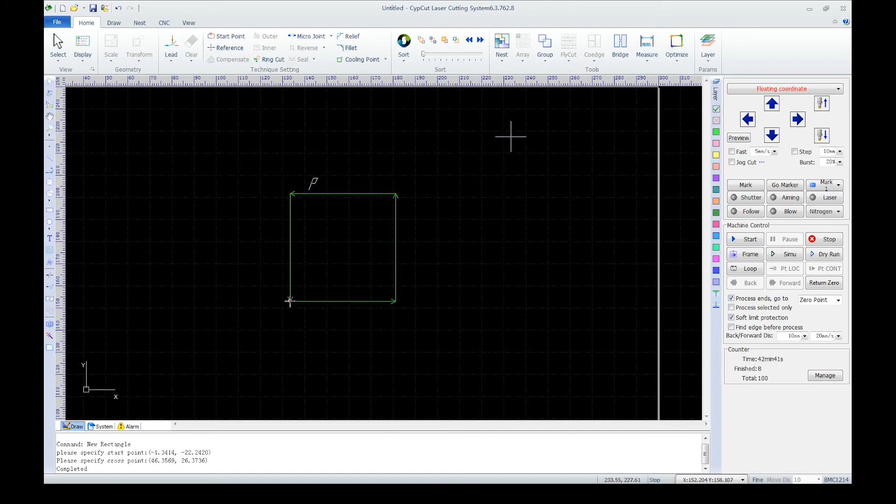So far we've learned about features in view, geometry, technique setting, which enable us to quickly draw graphics and set basic techniques. Sort, group, fly cut, and co-edge help us to simplify cutting paths to be efficient. Today we're gonna learn a few more features of layers, task, and find edge, as well as how to use the machine control panel.

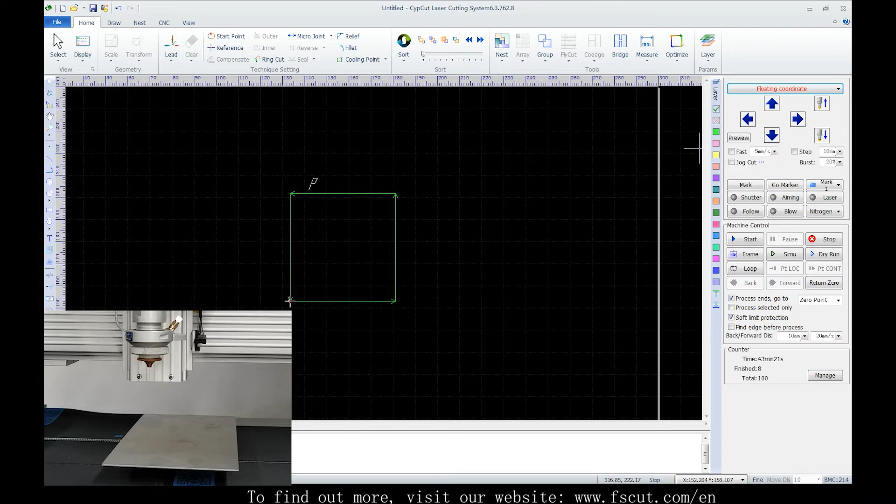Let's start with the machine control panel. First of all, we need to figure out the difference between floating coordinate and workpiece coordinate. Machine coordinate is a fixed system. To facilitate flexible cutting tasks, CypCut applies floating coordinate and workpiece coordinate. Direction definition in different coordinate systems is the same. The only difference is 0-point position. The white box is the machine bed, and the red cross is the laser head.

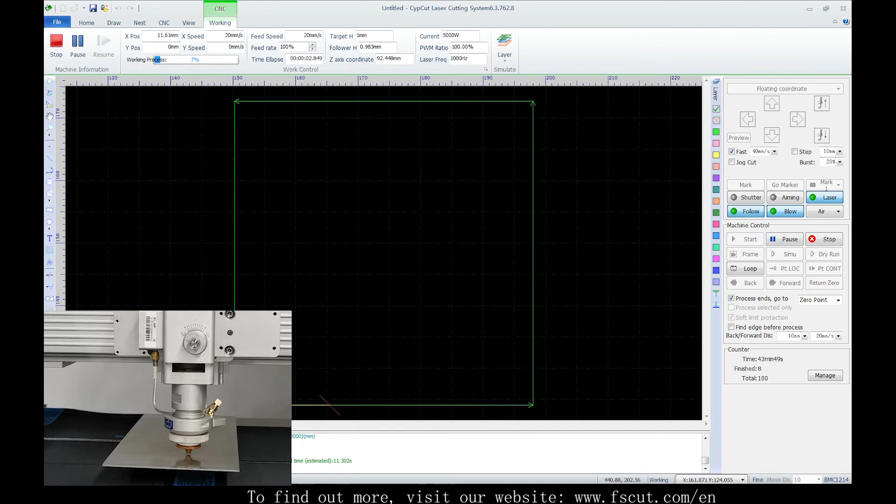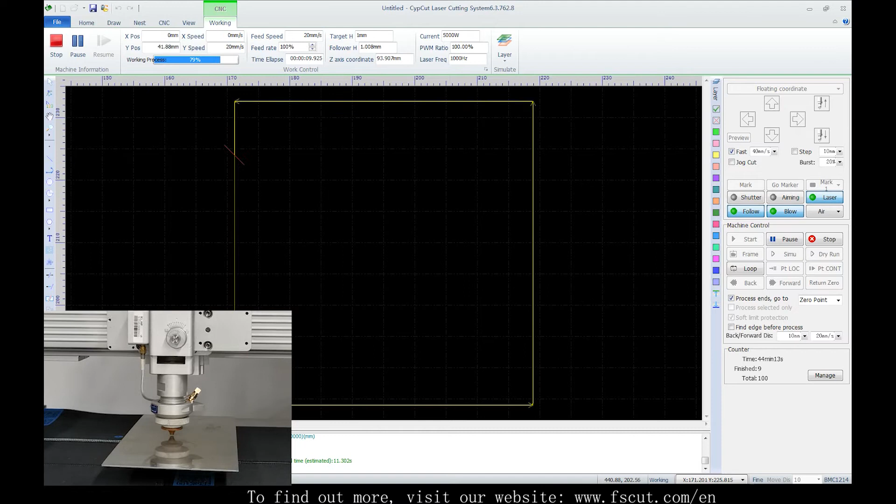On the floating coordinate, laser starts cutting from where it stands. 0-point is the current position of the laser head. Take this position. We can start right from the point. And if we move to another position, it will start right from it. Floating coordinate is usually used in small batch cutting tasks.

Under workpiece coordinate, we've got a default 0-point with its position 0, 0. But 0-point is a user-defined position under workpiece coordinate. CypCut allows users to set 9 workpiece coordinates of different 0-points. During the process, if the cutting head was moved to another position, so long as it gets an instruction to start, it will return to the graphic next to the defined 0-point, and then start cutting.

This coordinate is used in mass production scenarios where large quantities of plates of the same size are placed in the same position on the machine bed, which also requires a 0-point of fixed position.

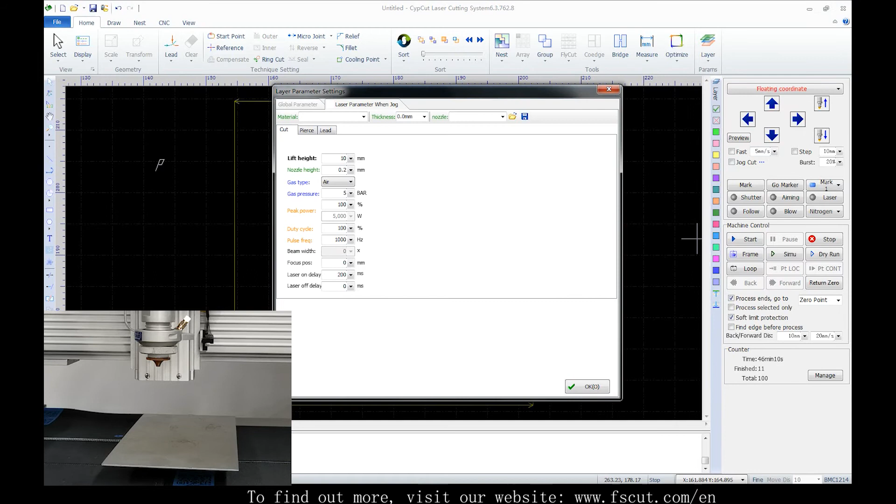Down below, with these buttons, we can jog along the X, Y, Z axis. We can change jog speed, and set a fixed jog distance. Jog cut is used to cut off plates. When selected, the cutting head will start to follow. Blow while jogging. And here, we can set the jogging parameter. Beside, this is burst power.

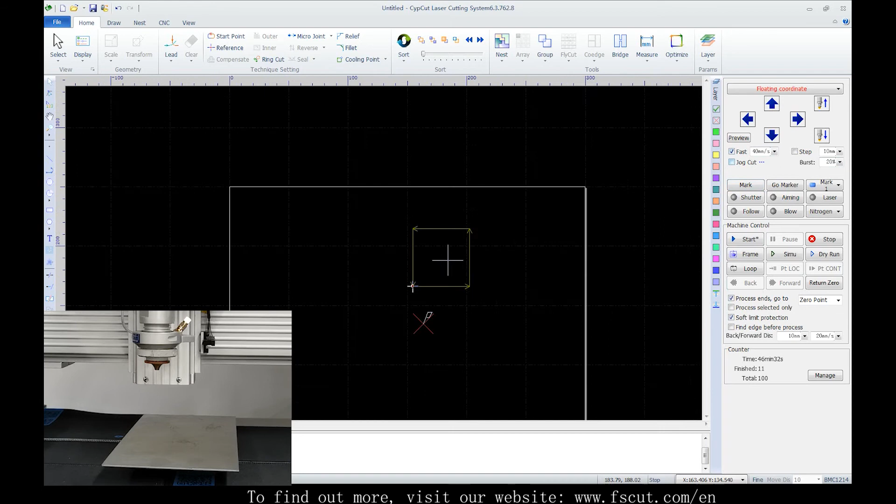Sometimes, according to need, we move the cutting head to a certain position. Mark is to mark the position with a little flag. And even if the head was moved away, by one click on Go Marker, we can go back to the position. We support 6 marks at most at the same time.

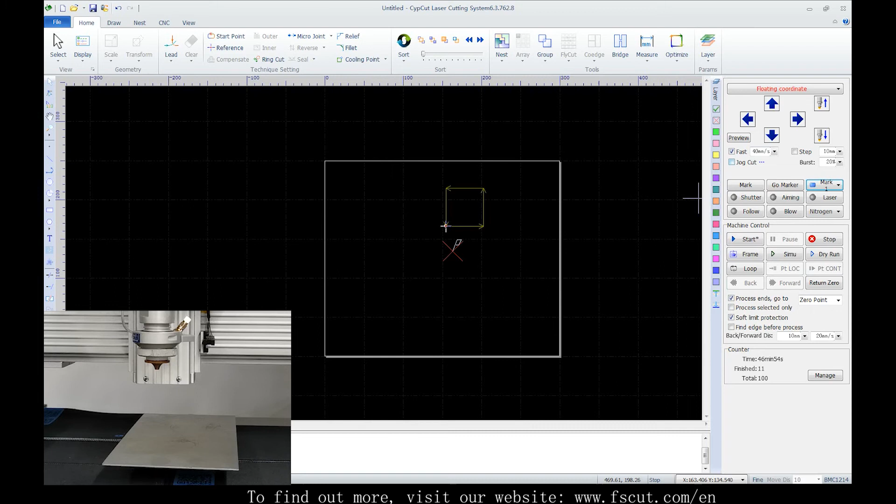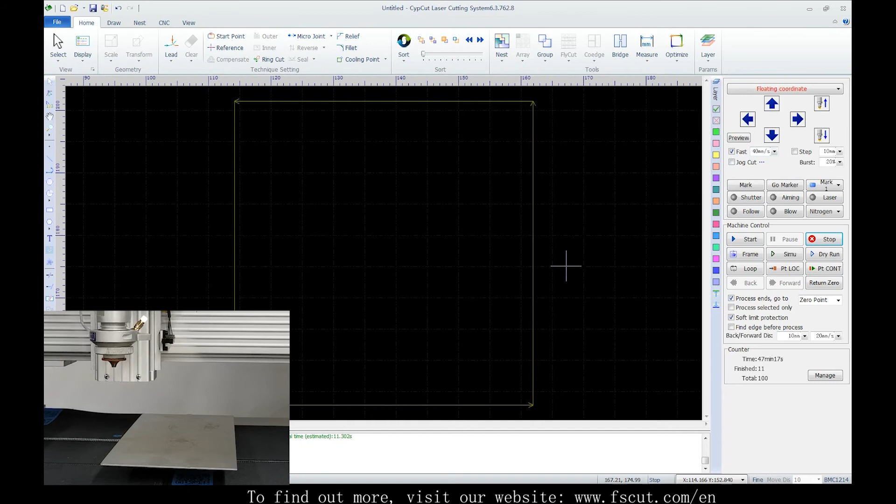Under floating coordinate, sometimes we may lose the 0-point position because of misoperation. Like we stop processing, move the head and directly start again. When that happens, in the drop-down menu of Marker, select Marked 0 and then Go Marker, and we can return to the 0 point of the last processing. The program will always keep the former 0 point.

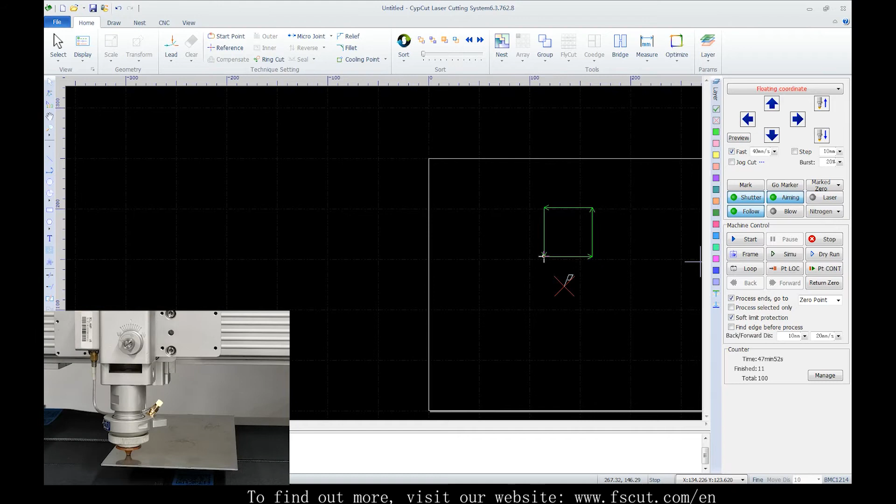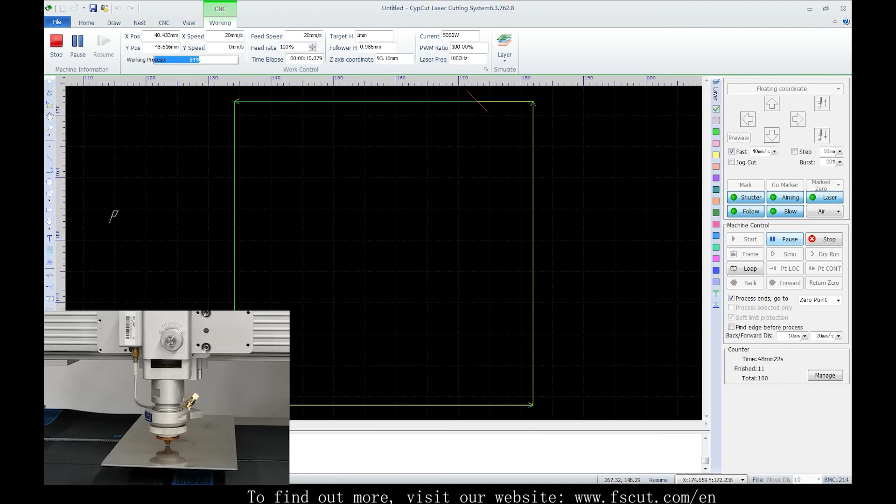And we've got Shutter. Select it to enable Laser. Aiming, which is the guide laser, and click Laser to cut. Hit Follow. The cutting head will follow to the plate. In the machine control panel, we've got Start, which means to start to process. And we can also pause, resume and stop during the process. And here, fast resume is to resume without piercing. Or we can go back or forward to adjust the resume position.

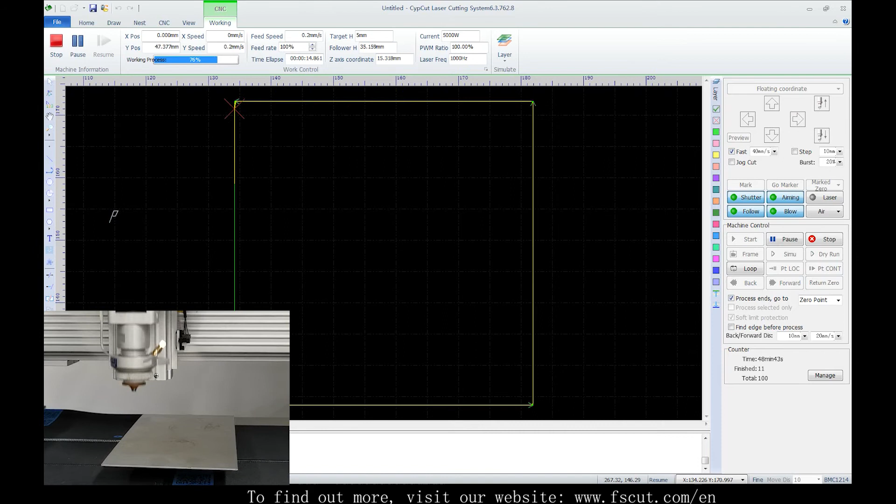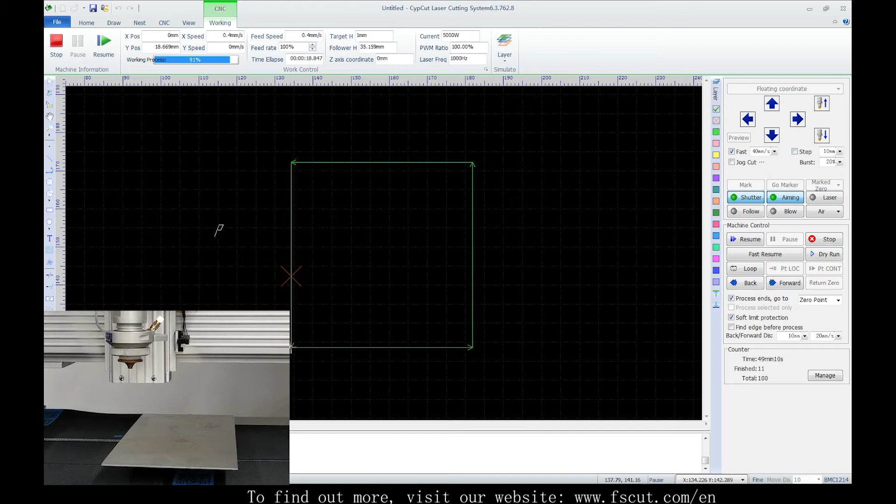Set the move distance right down here. When we stop processing without finishing it, and accidentally move away the cutting head, click Position Locate. With this button, we can get back to the breakpoint. Click Position Continue to directly resume from the breakpoint.

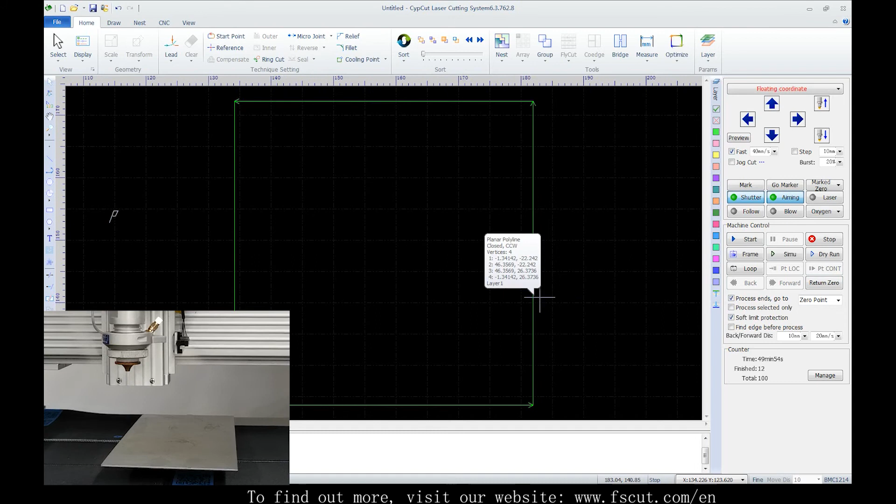We also support manually locating the breakpoint and resuming from it. After the processing is stopped, return to the 0 point. Make sure this step goes first or you will lose the 0 point position. And we can right-click on the graphic, and we will find Locate here and Start from here. Just do as we want.

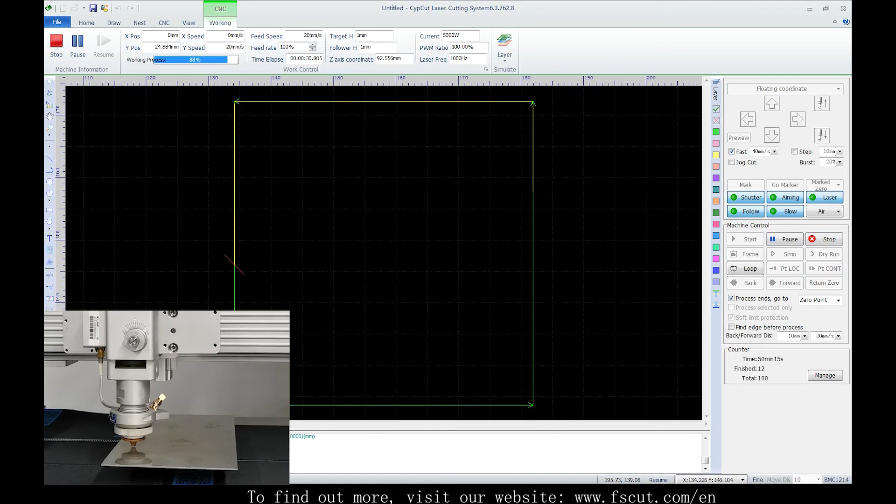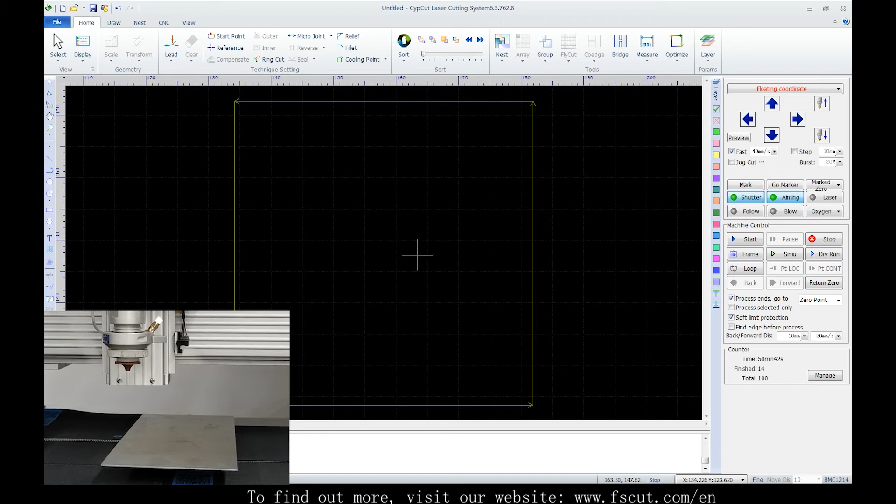Generally, we frame before processing to check the border of the cutting area. Click Frame on Control Panel. The laser head will frame, that is dry run, the cutting zone on the machine bed, in accordance with the drawing to be cut.

We can check the cutting path by this simulation. We can change simulation speed above in the menu bar. It only demonstrates sequence in drawing, doesn't execute any motion commands in machine.

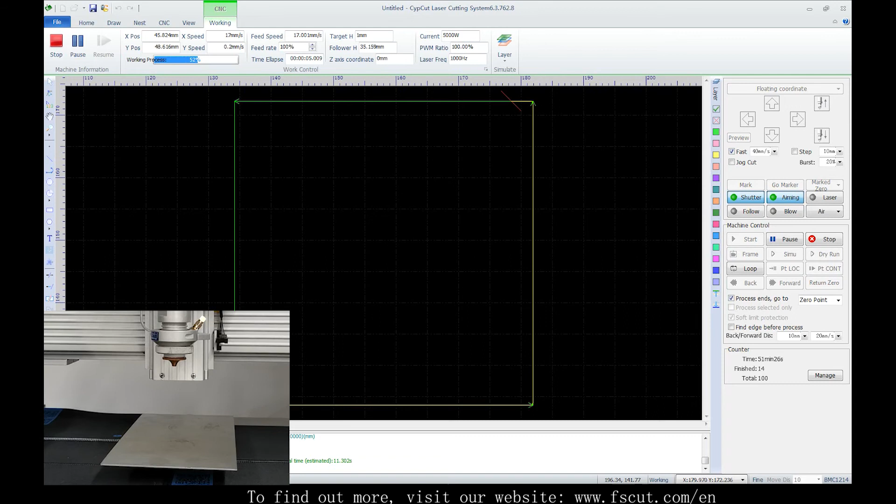Dry run is to travel along the designed tool path, not cutting it. Click Dry Run on Control Panel. Laser head will move along the tool path at preset cutting speed, while gas, laser, and PLC process are disabled.

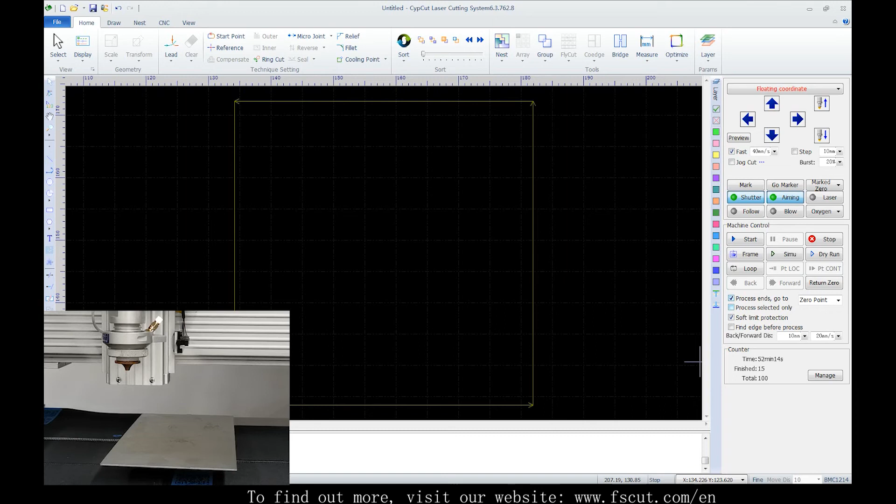Loop is for setting up the cycle times and interval between each cutting task. As for this return 0, once we frame under the floating coordinate, the 0 point will be fixed. If we moved the laser head away, we get back to this position by return 0. Besides, we can go to 0 point and the like after process ends, or process selected graphics only.

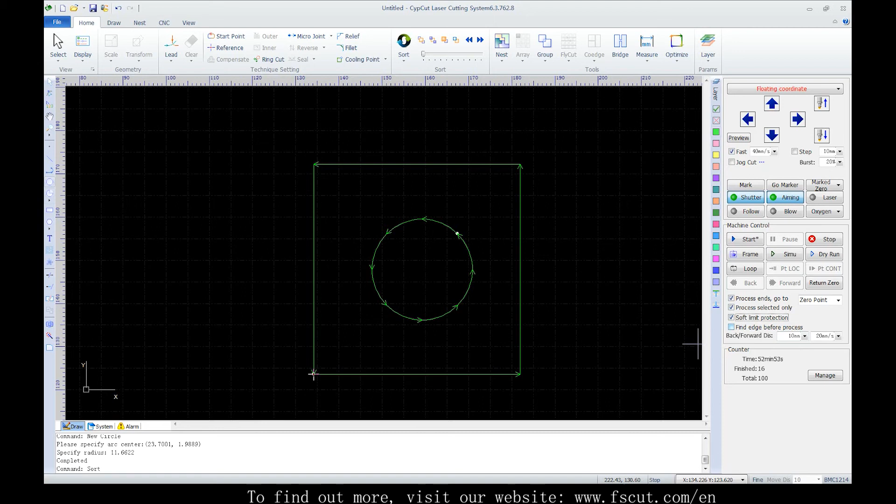We recommend selecting the soft limit protection so as to ensure that the laser head moves within the machine bed and avoid it getting crushed, and thus there would be risk if cancelled. Be careful. And here we have find edge before process.

Find edge is to locate workpiece edge precisely and find the workpiece 0. We can find it on the menu bar in CNC module as well. When the plate is not uprightly lying on the machine bed, machine can find the plate angle by targeting 3 or more points on plate edge, then offset the cutting area with this angle.

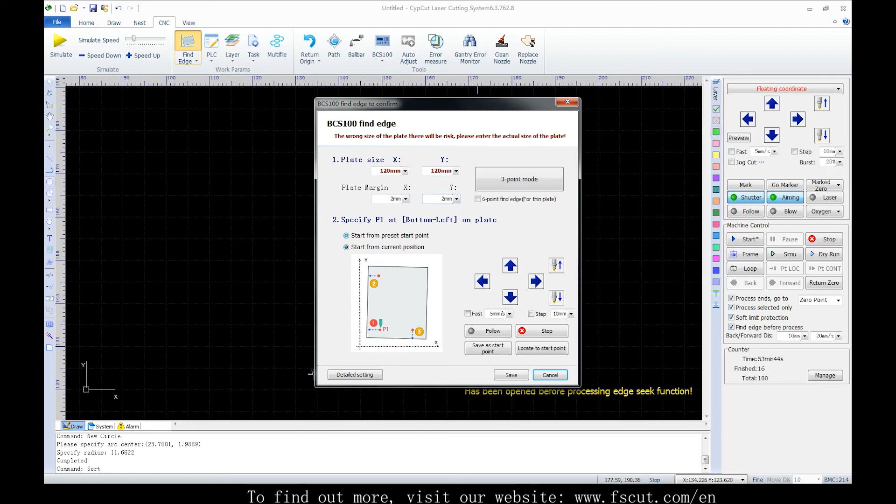Click Find Edge to set the parameter. We input the real plate size and the plate margin we want, and choose where to start. We can either start from current position or from a preset start point. Click the button to start from the current position to find edge right away.

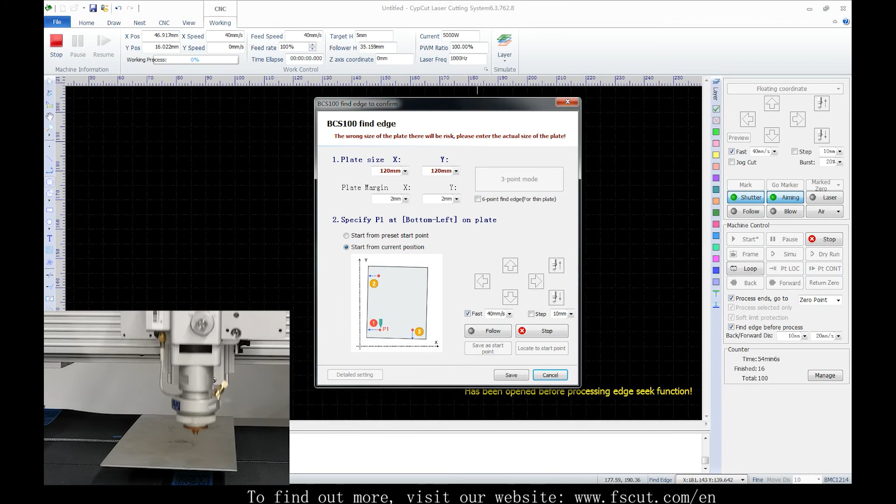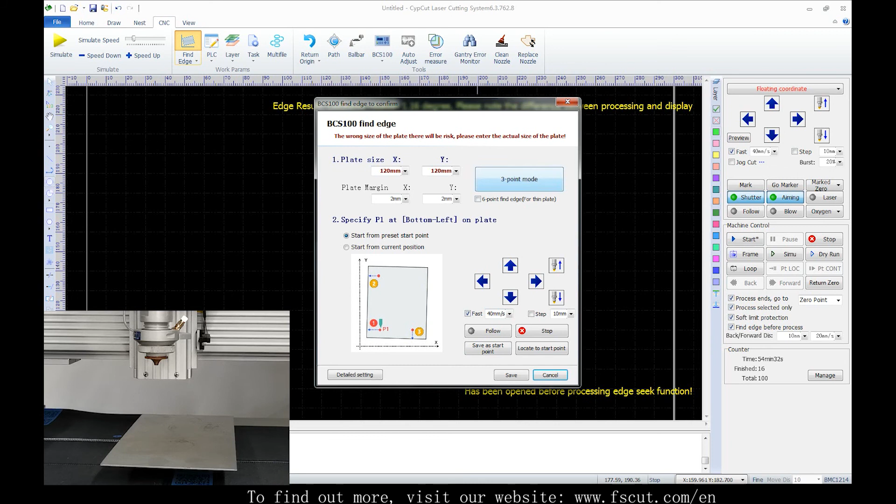For a preset point, we need to move cutting head to the position first, then click to save the position as start point. And now, even if we move the head to other position, hit Find Edge button, it will start from the preset point.

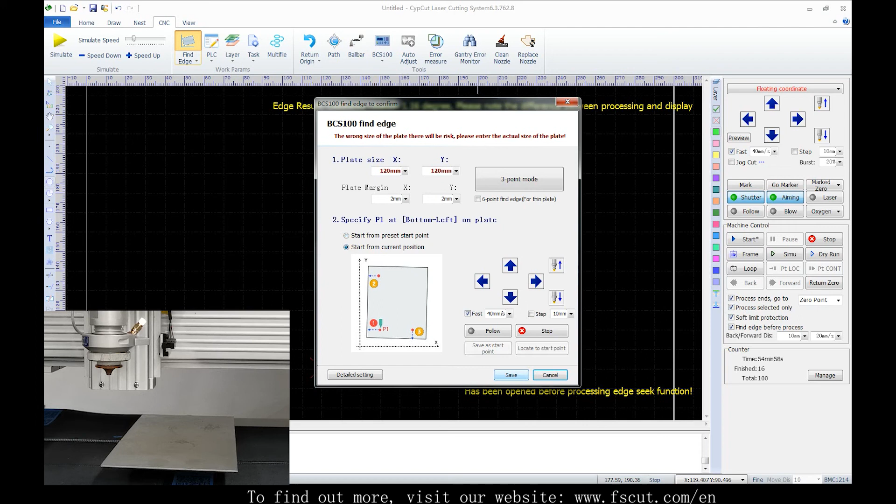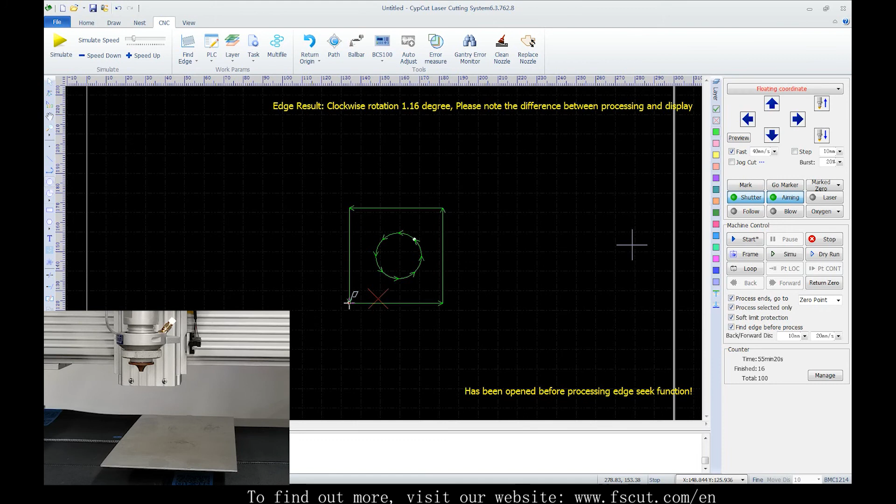Also, after the setup, on the other hand, select this Find Edge before process. The laser head will find edge before processing if we don't need to do it instantly. But no matter what, do make sure there is plate right below for the head to follow, or the head may get damaged. When we cut sheet metal, we recommend a 6-point find edge with higher accuracy.

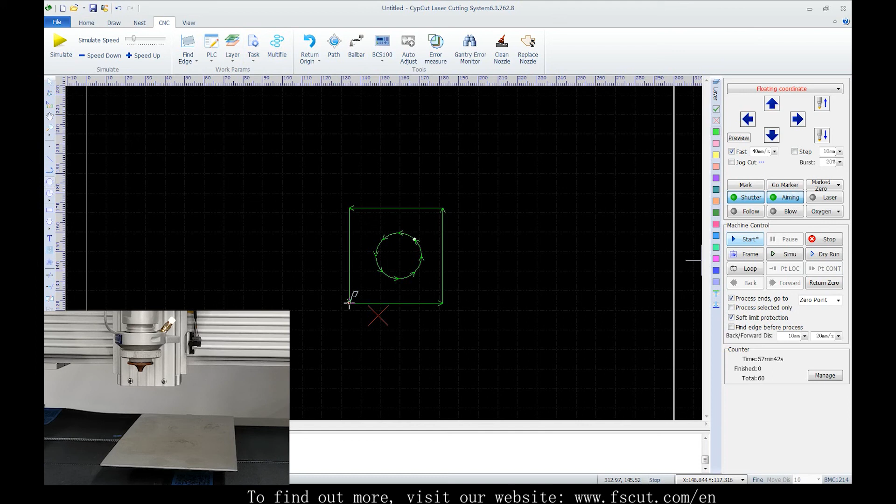Now, apart from those, we have 2 more features to go. First, let's see the task. When we have an urgent order and need to insert a cutting task, place the plate in vacant position on machine bed. Don't move the original one. We stop processing. In the drop-down menu, we save a task file, together with the drawing, breakpoint, find edge result of plate and the program 0.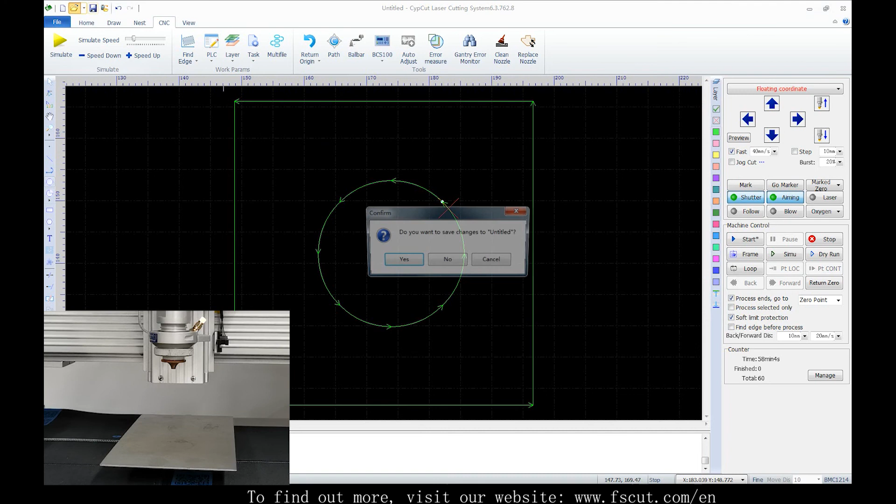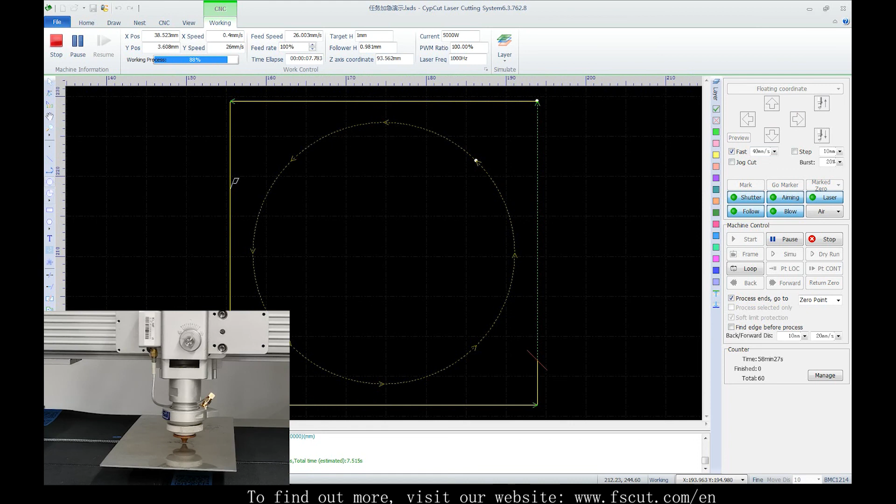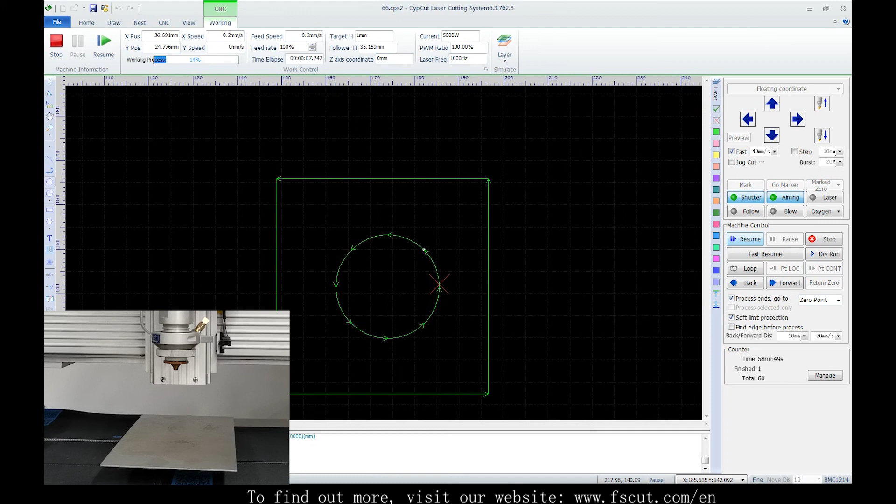Then we open the urgent one and get it processed. Now, as we can tell, the cutting head has been moved to other position. After we finished this one, load in the task file we just saved, and click Position Locate, and the cutting head will go back to where it just stopped, and the process can be continued.

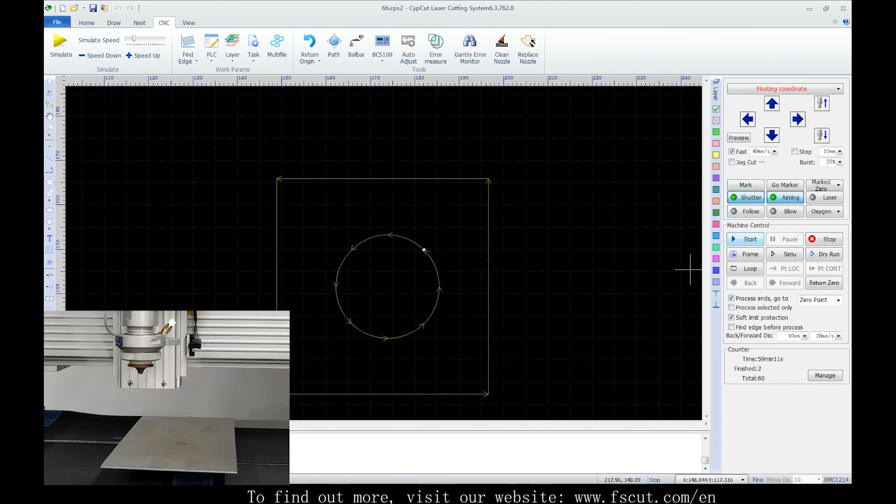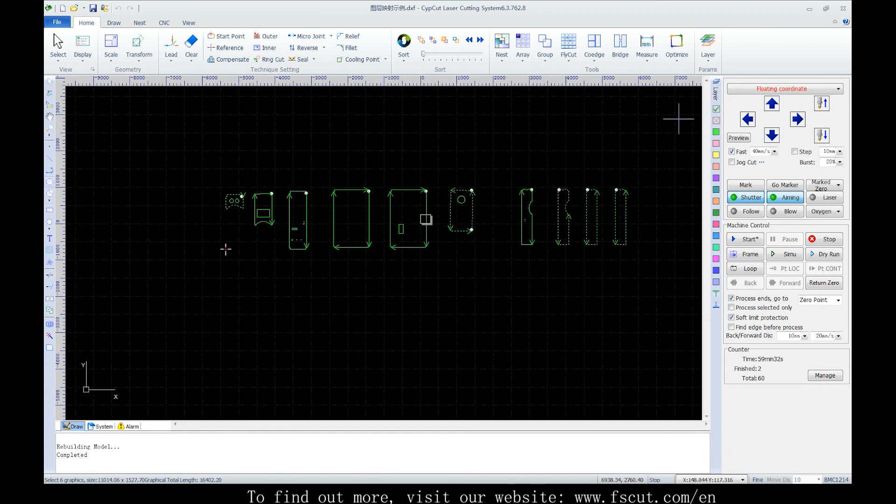The other is DXF layer mapping. In the drop-down menu of Layer, there is a DXF layer mapping. We already had graphics in different layers for cutting or marking when they were generated in the CAD. As it is imported into CypCut, we can appoint DXF layers into CypCut layers of cutting, marking, or layers that require different cutting techniques.

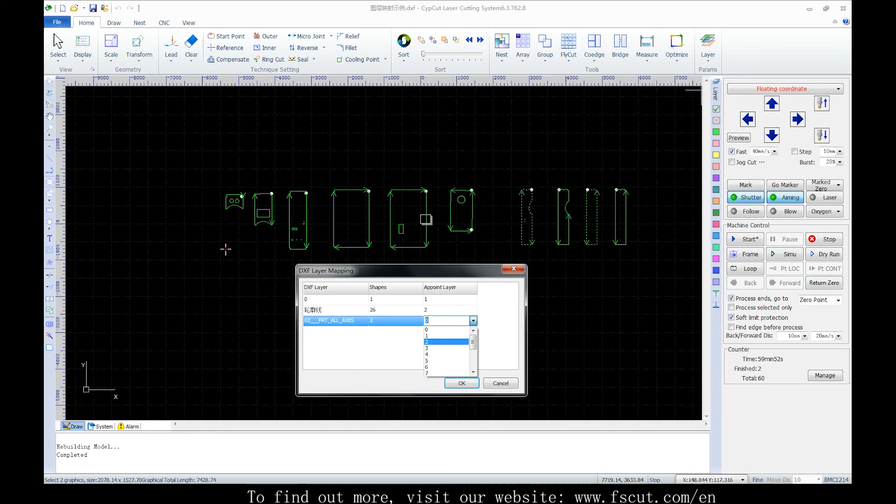Say we have this DXF format file with 3 layers. Appoint DXF layer to a CypCut layer. Click OK, apply to layers. This is how we do.

On the right here, we've got this layer bar with 18 buttons. The parts geometry marked by the second one will not be cut, while the first one is used to reset the parts to get cut. There are 16 layer options with 14 color buttons and the last 2 special options.

With these layer buttons, parts geometry appointed by the last but one will be processed first. It also works as marking layer. Parts marked by the last button will be processed at last.

Alright, these are for our CypCut laser cutting software tutorial. In the tutorial, we learned about main features of software, including view module, geometry module, technique setting, sorting, every single one in tool module, layer mapping, task, as well as the whole control panel features. All of them are utilized very often. Do improve your level of proficiency on them.